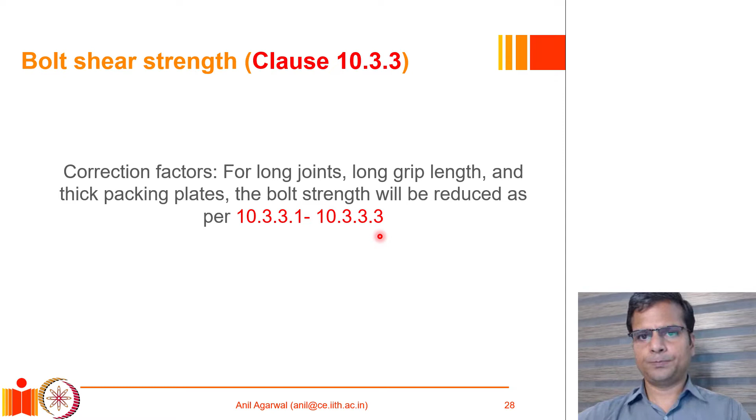All these provisions are discussed in clauses 10.3.3.1 to 10.3.3.3 of IS 800. We'll go through them one by one.

Now if we want to calculate the strength of each of these bolts, depending on the length of this joint, the force distribution to each of these bolts may not be uniform. So if the joint is small, we can assume that the plate in between the bolts is relatively stiff, and therefore if we approximate it to a rigid plate...

...then we can say with certainty that each of these bolts will have equal deformation, or in other words, equal force demands, and therefore when one bolt fails, all three bolts would fail at the same time, meaning we will be utilizing their full strength. Therefore the design strength of the bolt can be calculated as strength of one bolt multiplied by 3.

However, if this joint is a bit too long, then the flexibility of the plate in between starts to deform elastically, and because of those deformations, the three bolts do not shear equally. That means they don't deform equally. Some of the bolts at the edge would deform more, whereas some other bolts will deform less. As a result, the total strength of the joint will not be equal to the strength of one bolt multiplied by 3.

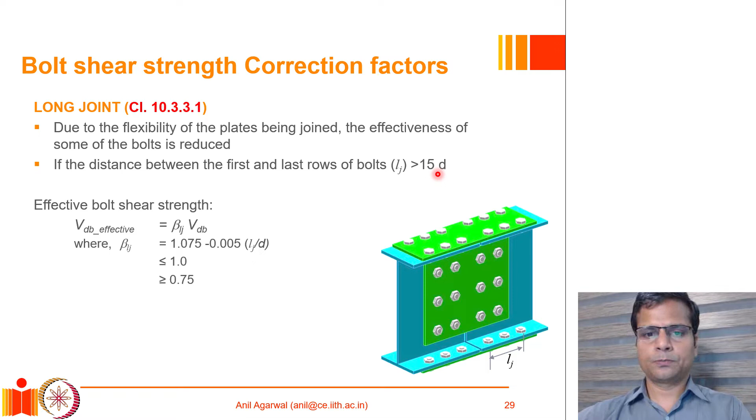Another correction factor that is relevant here is the bolt length.

So if the grip length or bolt length is more than a certain limit, then the effectiveness of the bolt is reduced.

In such a case, this bolt will not be undergoing pure shear kind of deformation, which ideally should look like this, but it will be going more of a flexural type of deformation.

So it will be a combination of shear and flexure, and that depends on the length of the bolt versus the diameter of the bolt. If the length is beyond a certain limit, it will undergo flexural deformation, and as a result there will be flexural stresses introduced at this interface, which will subsequently reduce the shear strength of that interface or shear plane.

So here the LG value is the grip length, which is basically the length of the bolt which can undergo flexure, and that divided by the diameter is a factor which, if it becomes more than 5 - length or grip length divided by diameter, which is relatively unusual but sometimes may happen - then we have to account for this flexural effect.

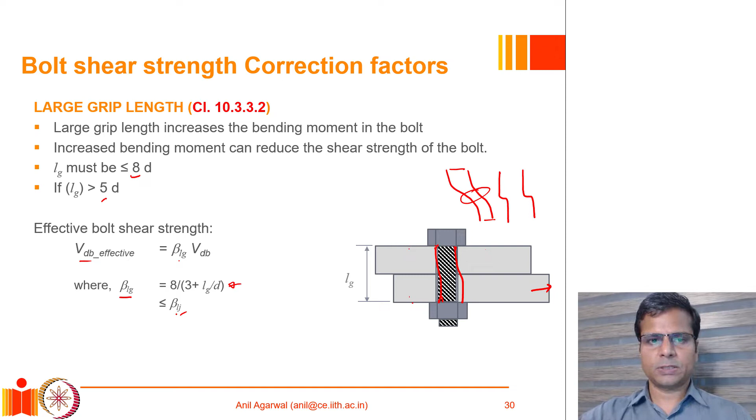If the factor LG divided by D is between 5 and 8, we have to calculate this factor beta LG that is used to reduce the effective strength of the bolt. The beta LG value is given by this expression, wherein LG divided by D is a factor, and this value has to be less than or equal to beta Lj, which we calculated for the joint length. So it cannot be greater than the beta Lj factor that we just learned how to calculate.

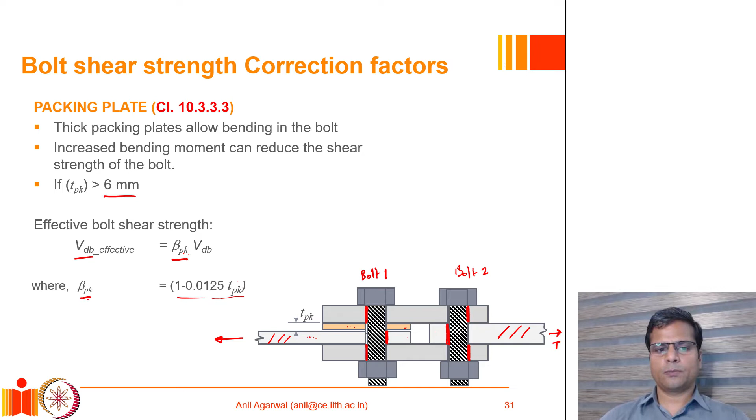So now we have seen these three correction factors, and we have also seen how to calculate the shear strength and bearing strength of a bolted joint. So let's do one example.

We'll take the same example that we were working with before with some minor changes. Let's calculate the design shear strength of this bolted splice in tension. This is a bolted splice. One plate is 18 millimeter, the other plate is 10 millimeter in thickness. It is being pulled in tension.

There is a packing plate which is placed here. Then two lap plates are 10 millimeters thick each. In addition to that, additional information is given.

The bolts are not friction grip bolts. These are snug tightened bolts, 12 millimeter diameter, and 10.9 high strength bolts are used, but they are not pre-tensioned. They are only snug tightened.

The plate is E250, that is 410 MPa ultimate strength. The clearance holes used are standard clearance holes, meaning that if the bolt diameter is 12 millimeter, the hole diameter would be 13 millimeter.

For simplicity, we are assuming in this example that these edges are far enough from the bolt so that they do not control, meaning the edge distance does not control the bearing strength of the bolted joint.

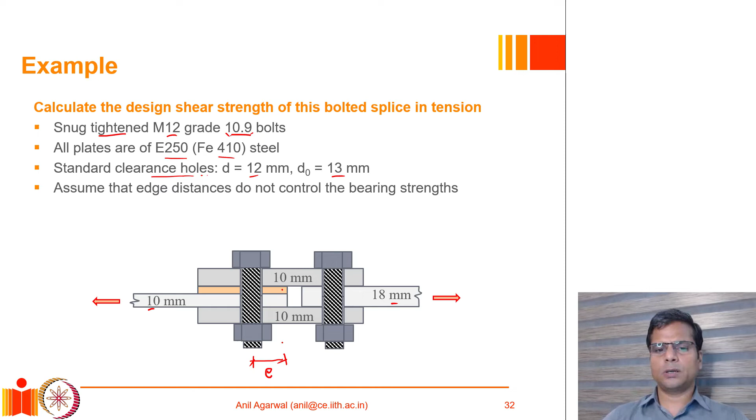So we know that this plate is 10 mm thick, this plate is 18 mm thick, and we know the packing plate is 8 mm thick. I'll write it as TPK is equal to 8 millimeters.

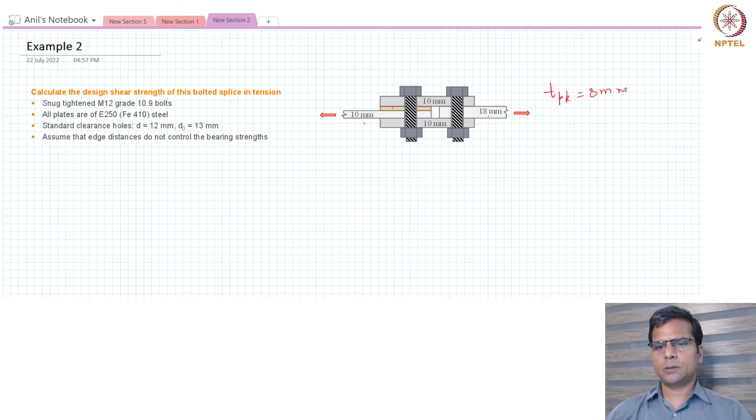Let me call this bolt as bolt 1 and this as bolt 2. We need to check the design strength of both of them.

Now, from this information that is given to us, we know that for the plate, Fu is equal to 410 MPa, Fy is equal to 250 MPa.

For the bolt, Fu is equal to 1040 MPa, and Fy is equal to 90% of that, which I've taken from the appropriate code, which is 940 MPa.

The bolts are both 12 mm diameter bolts. When they are subjected to shear, the net cross section area can be calculated as 3.14 (pi) multiplied by r squared, 6 squared, multiplied by 0.78, which turns out to be 88 millimeter square.

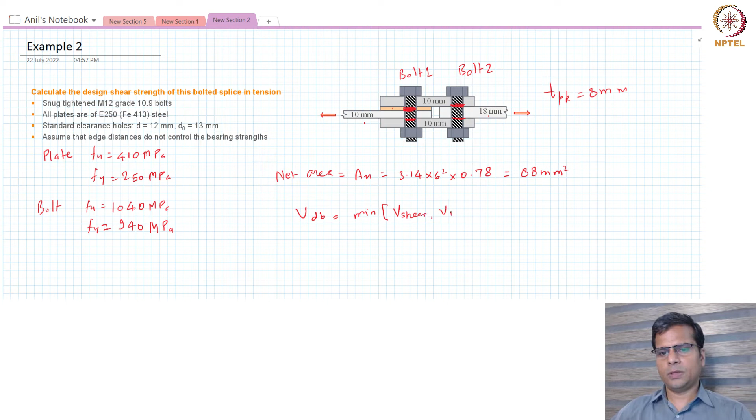We will start with bolt 1 first. For bolt 1, V shear, which will actually be the same in the case of bolt 2 also, but anyway we'll do it for bolt 1 first. V shear, the design strength, would be equal to Fu divided by root 3, multiplied by Nn multiplied by An — and we are assuming that both shear planes are passing through the threaded portion — divided by gamma mb. This turns out to be 1040 divided by root 3, multiplied by two planes, multiplied by 88 millimeter square, divided by 1.25, that is 84.55 kilonewton.

That is V shear. Now when it comes to V bearing capacity, shear capacity and bearing limit state, we have to look at this joint a little bit closely.

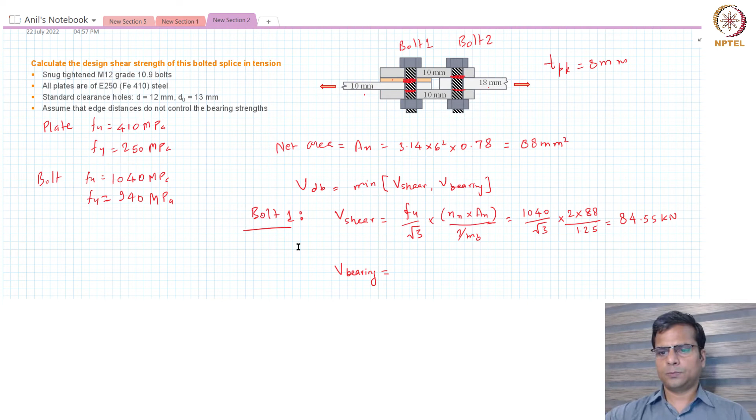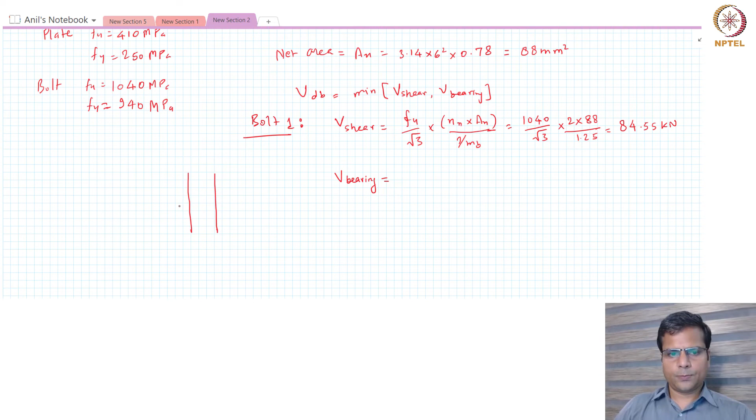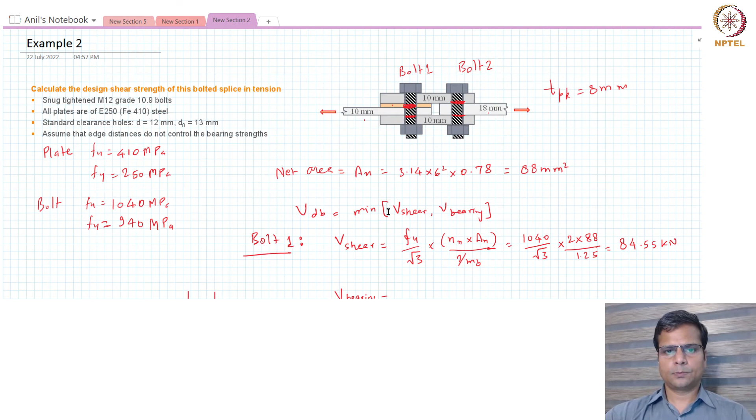So this is the bolt. Here, this is my 10 millimeter plate, which is being pulled this way. Then there is an 8 millimeter thick plate above it, and then there are two other 10 millimeter plates.

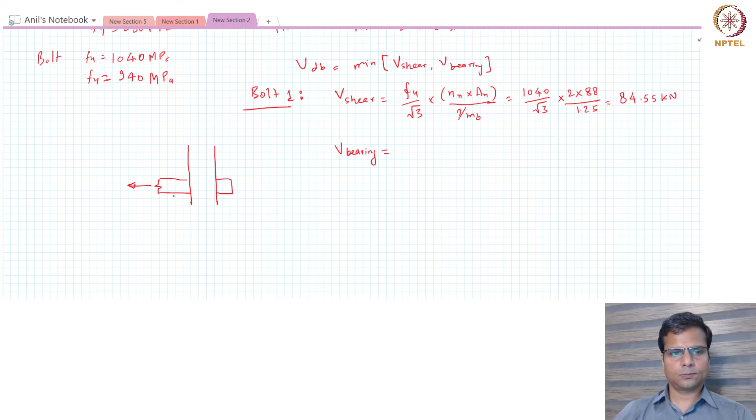This is an 8 millimeter plate. Then there is another 10 millimeter plate here and one 10 millimeter plate here. Both of them are being pulled this way. This is the packing plate which is not being pulled in any direction.

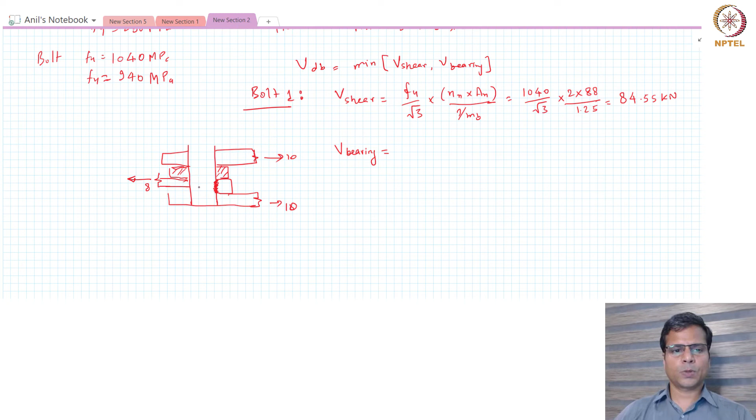So if we look at the bearing surfaces, here we would have a 10 millimeter long bearing surface. This thickness is 10 millimeters, so here we would have a 10 millimeter long bearing surface. Similarly, here we would have two 10 millimeter long bearing surfaces.

So which of these two surfaces would fail first? Obviously, the surface with only 10 millimeter length would fail first. So we will design for this one. We will calculate the design strength of this surface.

The expression for bearing strength is 2.5 dt divided by gamma mb multiplied by minimum of fu, fy, fub, fup, and then some other factors which we have already assumed are not going to control, because the pitch distance and edge distances are not going to control the bearing behavior.

Now between FUB and FUP, which one is smaller? FUP is smaller, that is equal to 410, and this is much greater. So we will ignore FUB, we will only take FUB is 1040, whereas FUP is only 410, so we will take this one. And the bearing strength will be calculated as

2.5 multiplied by the diameter, 12 millimeters, thickness is only 10 millimeters, only one, because on this side we have only one 10 mm thick interface, multiplied by 410 divided by 1.25, which turns out to be 98.4 kilonewton. This is for bolt 1.

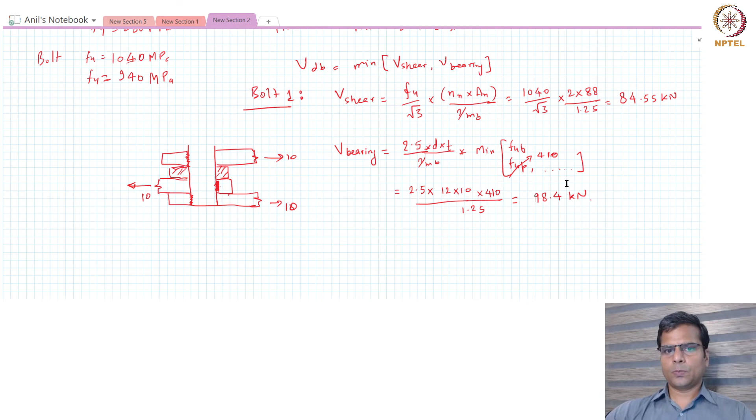Now this was the shear strength, 84, and bearing strength is 98. Therefore, VDB for bolt 1 is equal to 84.55 kilonewton, minimum of the two.

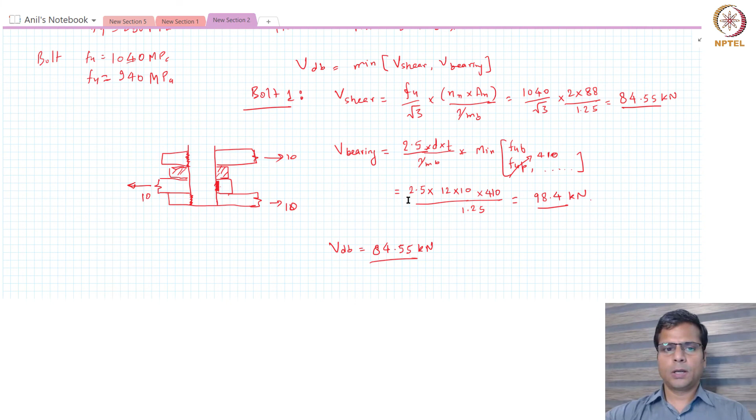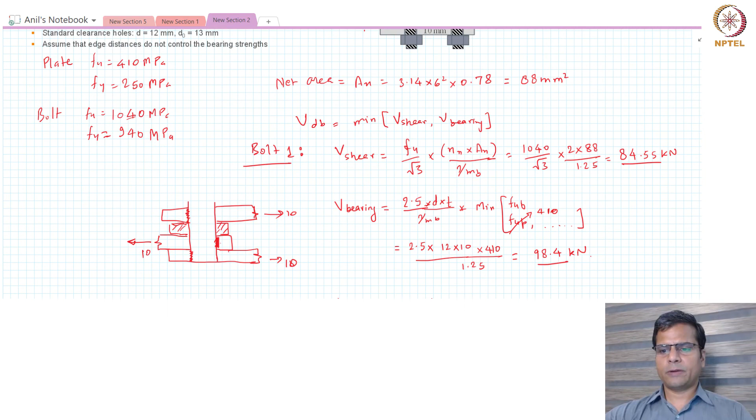However, we might not have noticed here that there are some correction factors that might have to be applied. So let's look at those correction factors quickly. There are three correction factors we have talked about. One is the correction factor for the length of the joint. So in this case, the joint does not have any length. It is only a single row of bolts, so the length of the joint factor does not matter, right?

The other factor, note it down. Correction factors: joint length does not matter because joint length is very small.

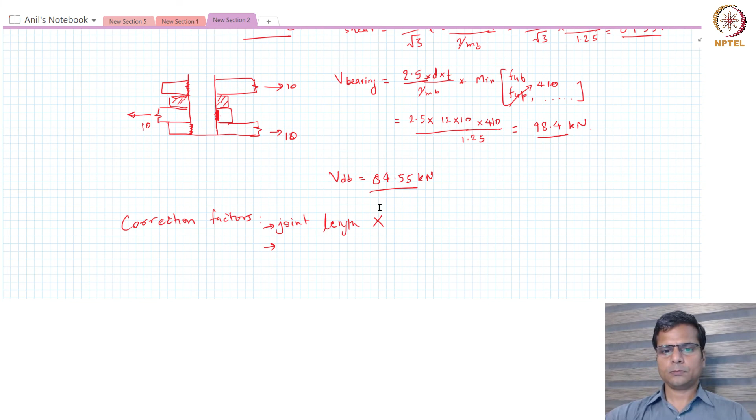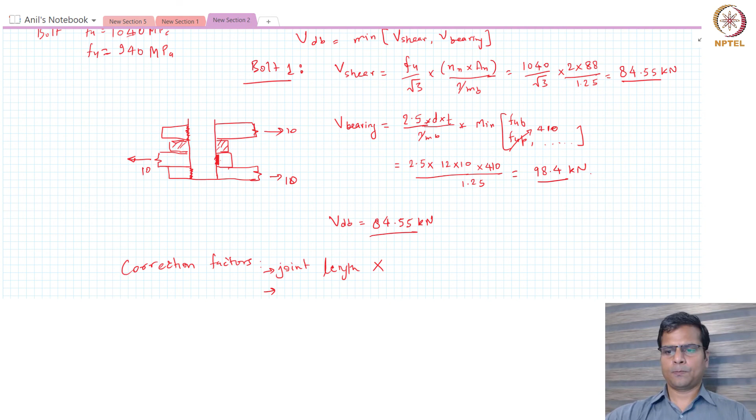Then the second factor is the long grip, and we remember that long grip matters only when the grip length divided by the diameter of the bolt becomes greater than 5. So in this case, what is the grip length? Grip length is equal to 18 millimeter plus 10 plus 10, so that is 38 millimeters. Grip length is 38 millimeters and the diameter is 12 millimeters. 38 divided by 12 is only equal to 3.17, which is less than 5. Therefore, this factor will also not control the design. This will not reduce the strength of the bolted joint.

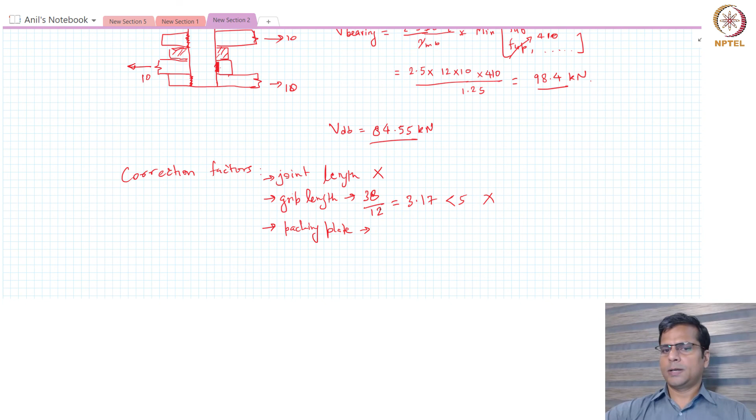Now the third factor that we need to be careful about is the packing plate. If the packing plate is greater than 6 millimeter thick, then it reduces the strength of the bolt. And in this case, we can see that the packing plate is 8 millimeters thick. So if the packing plate is 8 millimeters thick, the correction factor for the packing plate,

which will turn out to be, this TPK will be 8 millimeters and this will be 0.9. So this factor is 0.9. Therefore, VDB corrected will be 90% of 84.55 kilonewton, which will be equal to 76.1 kilonewton.

Now, all this calculation belongs to bolt 1. The question is, what would be the strength of bolt 2? Will it be greater than the strength of bolt 1 or not? Now, if you look carefully, the shear strength V shear for bolt 2 will be exactly the same as V shear of bolt 1. There are two planes, same cross section area, everything else is the same.

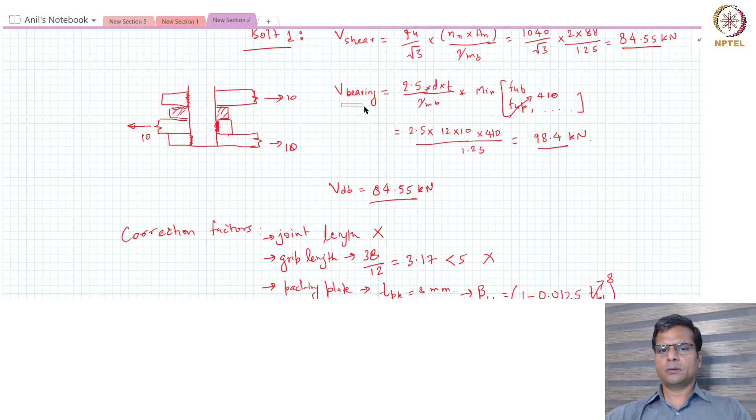So it won't change. The bearing strength, now we see, in case of bolt 1, the bearing surface area that was available to us was only 10 millimeter thick. Whereas in case of bolt 2, we have 18 millimeter available for this plate and 10 plus 10, 20 millimeters available for these two plates. So the bearing surface area would increase. Therefore, V bearing for bolt 2 will be greater than this value.

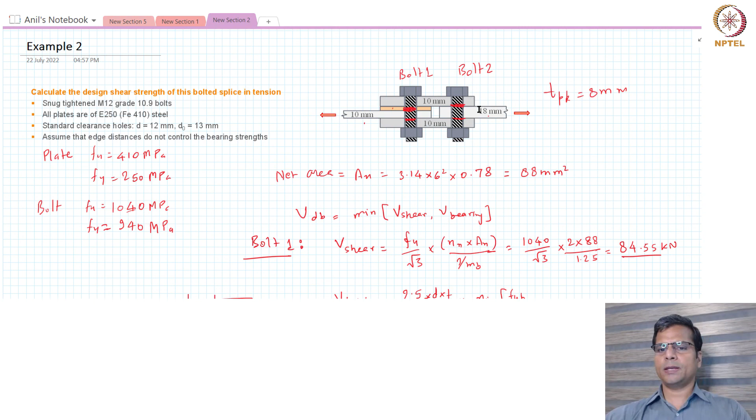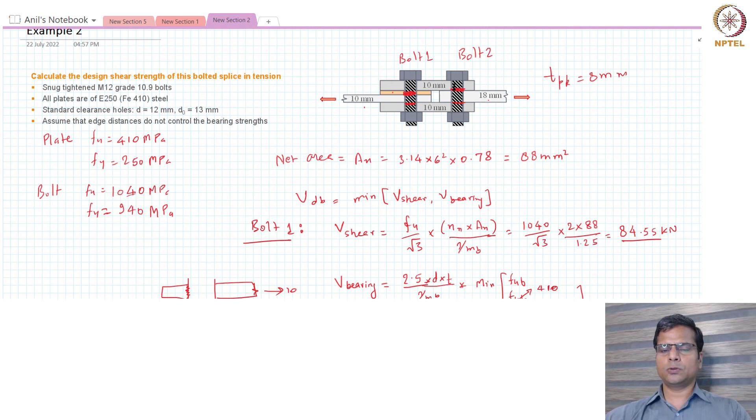Now comes the correction factor. So bolt 1 had a packing plate, but bolt 2 does not have a packing plate. So therefore, there won't be any correction factor applicable to bolt 2. Therefore, overall we can see that bolt 2 is going to have a higher strength than bolt 1. Therefore, we don't have to design separately for bolt 2. The connection strength will be same as the strength of bolt 1, which has been calculated as 76.1 kilonewton.